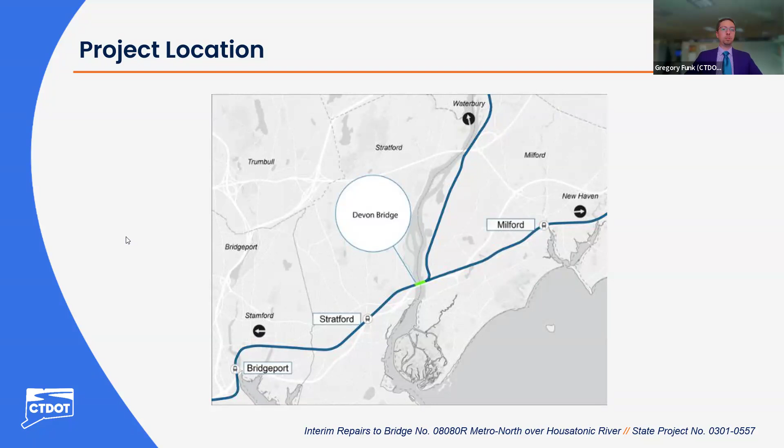So this virtual public information meeting is for the Devon Movable Railroad Bridge, which carries the Metro North Main Line over the Housatonic River between Milford and Stratford. The structure is number 08080R, and it is at railroad milepost 60.42. So the purpose and need of this project is to rehabilitate the Devon Movable Railroad Bridge to keep the structure serviceable until the replacement structure can take over rail service. And just to note that this meeting is for the interim repair project only. The full replacement project is in the preliminary stages and not part of this meeting.

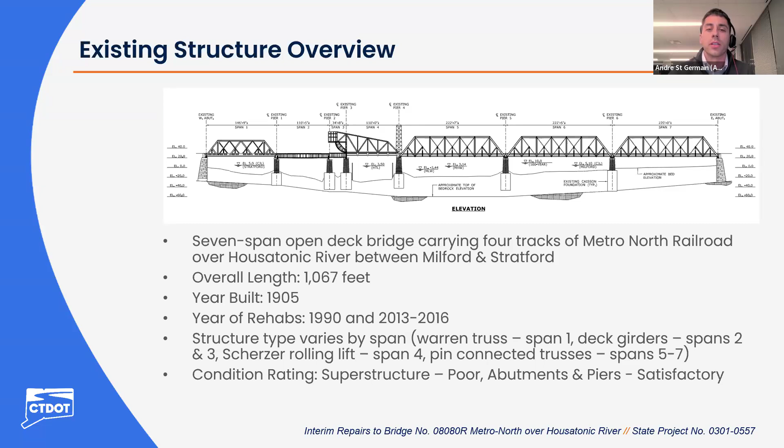Some other generic terms that I'll be using. Live load, this refers to the weight of the train that goes over the bridge. Dead load refers to the self-weight of the bridge itself. Finite element model, this is a computer model that is developed to closely imitate or replicate the actual real-life bridge.

Strain gauges, these are instruments or monitors that are attached to the bridge to gather information about the strain or stress or force that is going through each member. Hi-rail, this can be a construction vehicle or a maintenance vehicle that's intended for use on the railroad.

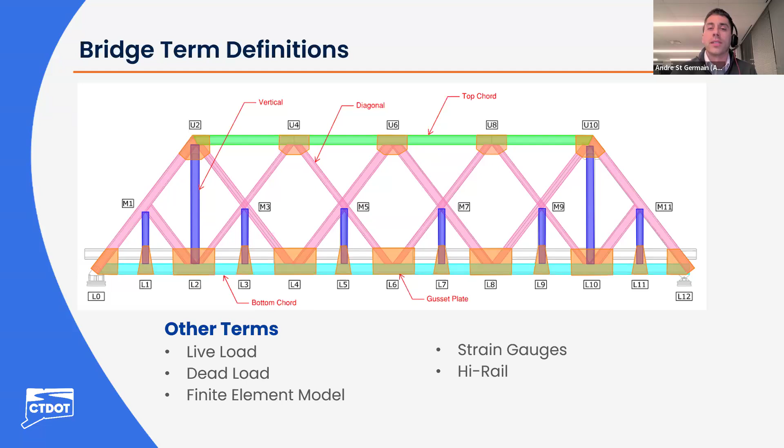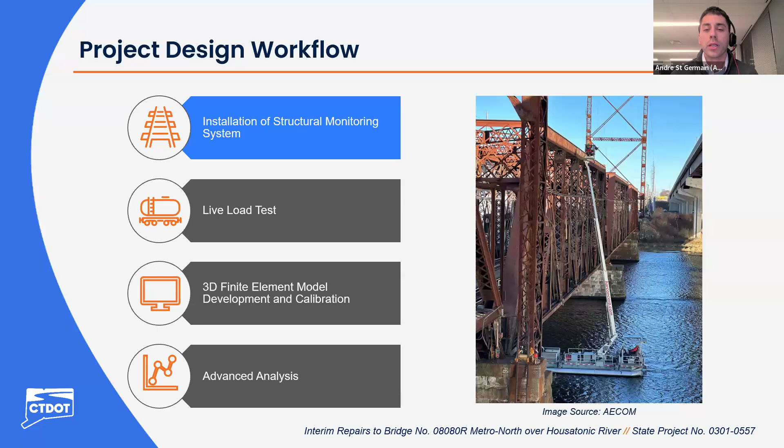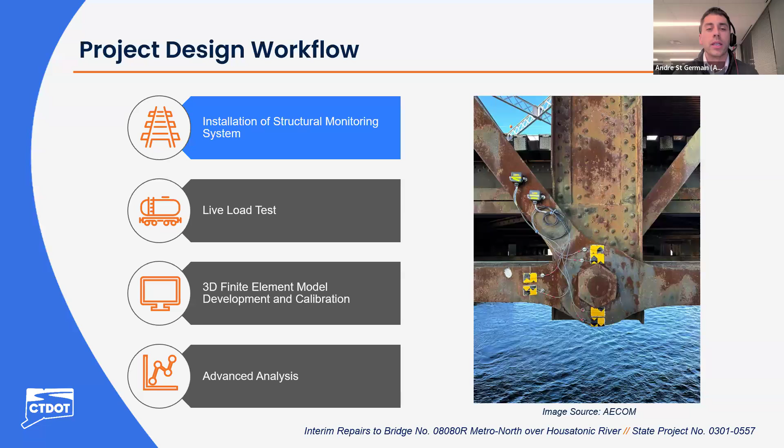Those data acquisition units communicate wirelessly to a computer that's actually on the bridge site. And then that's connected to the internet. So all the data that we collect gets uploaded to the cloud and we can access it live.

So after the strain gauges are installed on the bridge, we did a live load test. So basically we took a train with a known load. This is a GP35 locomotive. We know all the axle weights, we know the axle spacing, and we moved it across the bridge back and forth.

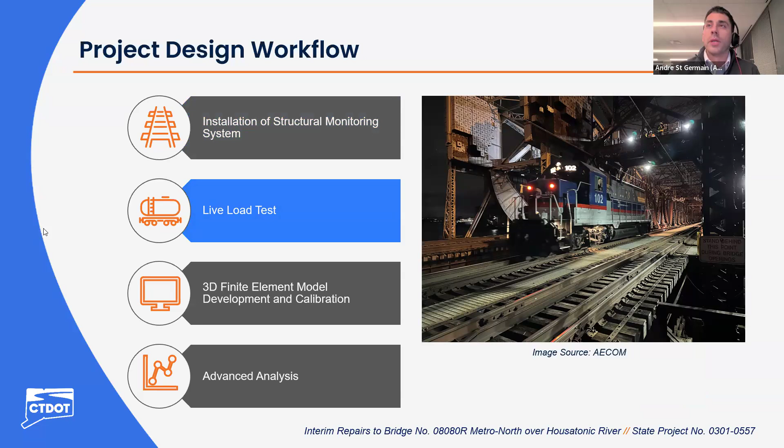And then using that information, we collected all the information from our strain gauges and we developed this 3D finite element model or computer model that closely replicates the existing bridge. And then using the data that we collected from the live load test, we can tweak the model so that it more accurately represents the behavior of the actual bridge. So we call that model calibration.

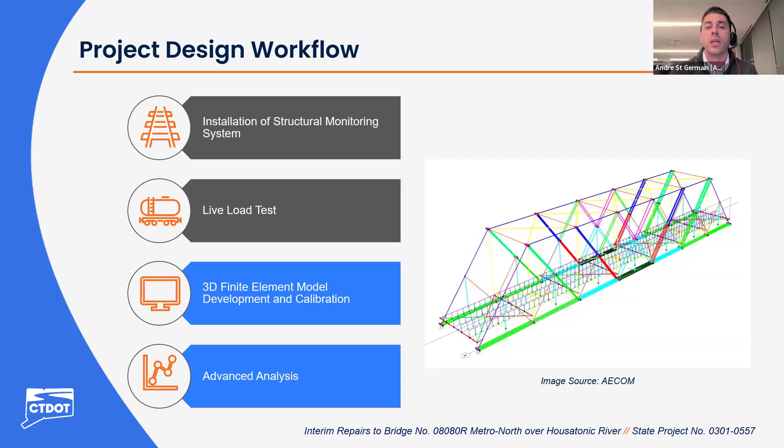And then once the model is calibrated, we can move on with our analysis and figure out exactly which members should be retrofitted to achieve that service life extension that we're talking about.

I will give an overview of the proposed repairs. So the bridge will essentially remain the same in terms of the footprint. So the number of spans will stay the same, the length of the members will stay the same, but we're going to be adding on or retrofitting the existing members. So from afar, the bridge is not going to look any different.

Some of the retrofits that we're talking about are adding additional steel plates to truss members, or the gusset plates, which are the connections between the truss members, or the connections maybe in the floor system where you have stringers and floor beams. There will be no modifications to the existing abutments and piers, as those are in satisfactory condition.

There will be no permanent changes to the surrounding environment. There will be some temporary impacts, and Ryan will talk about that in a little bit, but those are fairly minimal. And there will also be some temporary change in the low chord of the bridge, and I'll talk about that in a few slides, where we have an underslung platform as one means of access. So temporarily, the vertical clearance will get less beneath some of the spans.

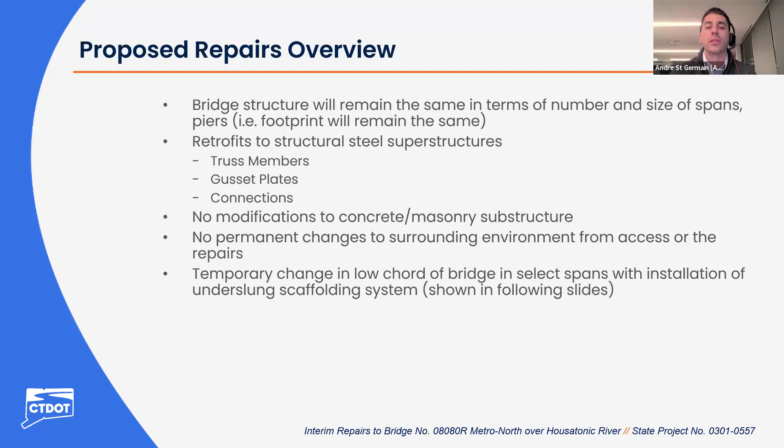To perform the work, there are 3 different types of construction access we're looking at. I'll go from left to right here. First, you have the Flexifloat system. So this is a modular floating barge system. It's kind of pieced together, and you could build it to any shape or size that you want, but it's very durable and suitable for heavier construction equipment. So that is one type that we'll be using.

Next in the middle, you have a QuikDeck. So this is an underslung platform that is suspended from the bridge above. Again, this is sturdy enough to hold equipment, materials, and workers as well. And then on the right is a high rail vehicle. This has a bucket along with it. So it's a construction vehicle that uses the rails on the railroad. And we'll be using all 3 of these. Those high rail vehicles can gain access to the track either from Naugatuck Ave in Milford or Longbrook Avenue in Stratford, depending on which track it's getting onto.

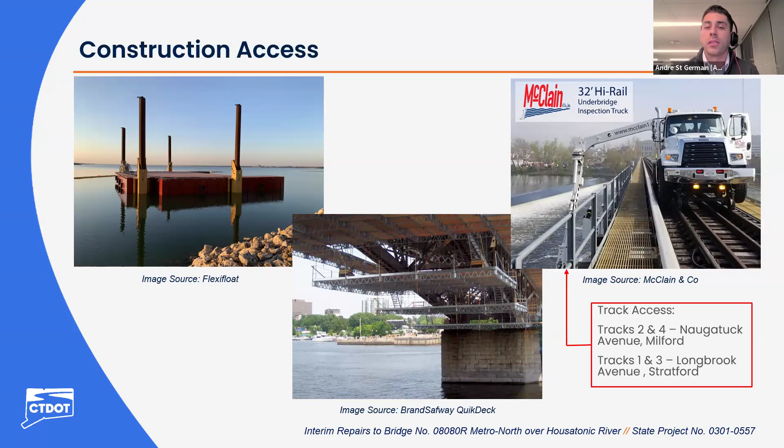And here's a graphic that comes out of our preliminary design submission showing the 3 different access types. I've highlighted them. So the highlights in green, those are the barges or flexi floats that we'll be using. At any given time, we'll only be using 2. This plan shows a lot more than 2 because this shows it for every single span, but we're only going to be using 2, and they're going to move sequentially. We're going to perform the work 1 span at a time, and the barges will move as the work is completed. The barges were used everywhere where it was deep enough to use barges.

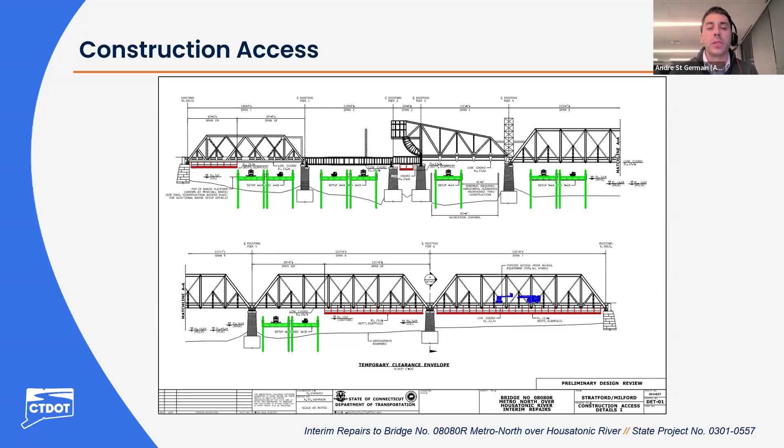So you'll see we're supplementing that with an underslung platform, which is highlighted in red. For instance, in span 1, which is the top left of the screen, all the way on the left side, it's too shallow for barges. So that's why we have the underslung platform proposed there. In the top middle of the screen is span 3. This is a very short span. And we need to use an underslung platform here because a barge just cannot physically fit within that area. And then in the lower right-hand corner of the figure, we're going to be using underslung platform beneath span 7 and a part of span 6 because it's too shallow. And then the third type is the high rail vehicle. So that's what's shown in the lower right-hand corner as well in blue. So we'll be using all 3 types depending on the span and location.

For the flexi float barging, we've been coordinating this closely with Connecticut DOT and Connecticut DEEP. The use of the Housatonic boat launch is prohibited on this project. This will remain open and operable at all times to the public. The contractor is not permitted to use this for construction activities. So the contractor will need to acquire waterfront access elsewhere.

For staging and laydown areas, there's a few different options. For work occurring on tracks 2 and 4, which is on the southernmost bridge, there's an area beneath I-95 on the Milford side. It's a big kind of dirt gravel lot. That will be used. And then it may also be used for work on tracks 3 and 1. If additional staging areas are needed, the contractor must acquire those areas for staging and laydown areas.

So there are some navigational impacts as there will be barges within the river. I mentioned there are 2 barges anticipated at any given time. One would be a work barge that would be about 30 feet by 60 feet, and one would be a material barge about 30 by 45 feet. Again, 2 barges at a time. They will progress span by span. The use of the Housatonic boat launch is prohibited, so that cannot be used.

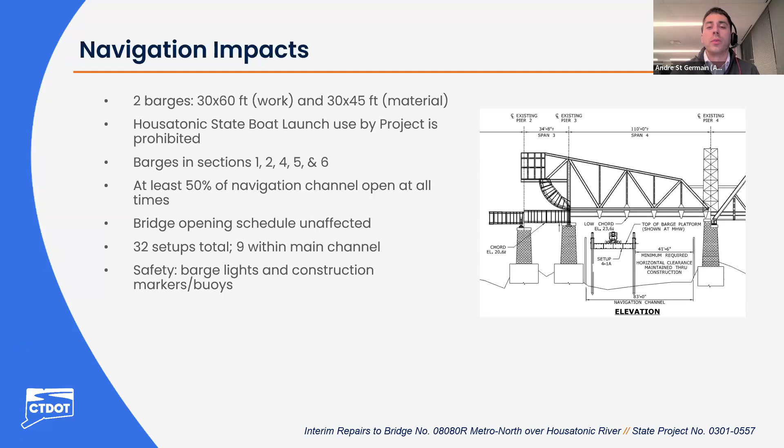And now I'll turn it over to Ryan Apanovitch, who's our environmental lead, to talk through some of the sensitive areas on this project. Thanks, Andre.

So as Greg and Andre mentioned, the project spans a tidally influenced navigable waterway, the Housatonic River. There are vegetated tidal wetlands on both banks of the river. And in addition, to the south of the Devon Bridge, there are mitigation sites that were put in place and created as compensation for impacts that occurred on a previous Connecticut Department of Transportation project for the Moses Wheeler Bridge. Shown in these pictures on the southwest side of the river are some of the areas that are indicative of the banks of the river. There are mud flats and sparse tidal vegetation between the Moses Wheeler Bridge and the Devon Bridge.

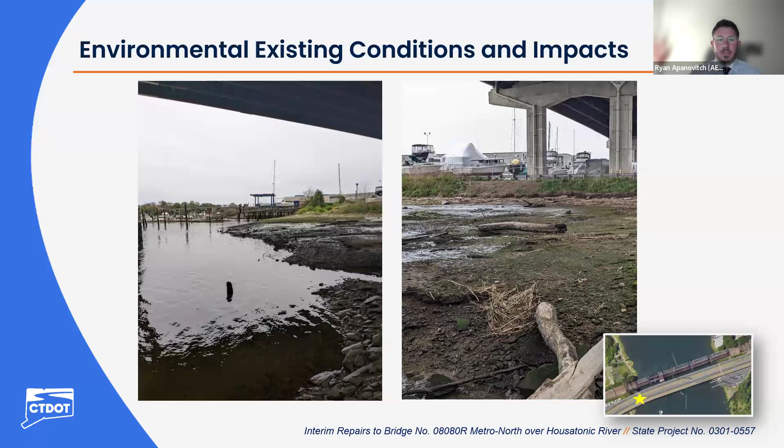Shown in these pictures, on the easterly side of the river, southeast of the bridge, you can see some of the mitigation areas that were created. In the photo on the left, you can see a mud flat, and on the photo on the right, you can see some sparse vegetation that's just starting to grow from the beginning stages of the mitigation sites that were constructed.

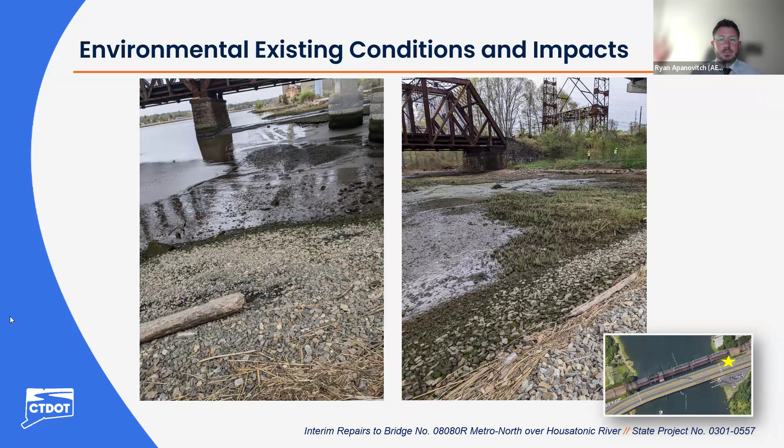These photos are further south of the bridge, south of the Moses Wheeler Bridge, and the photo on the left shows the boat launch, which, as Andre stated, will not be used or impacted as part of this project. It will remain open and accessible to the public during all phases of the work. To the right on this photo is just a picture of what the natural tidal wetlands look like in the area. So one of the secondary goals of the project was to avoid impacting locations like this.

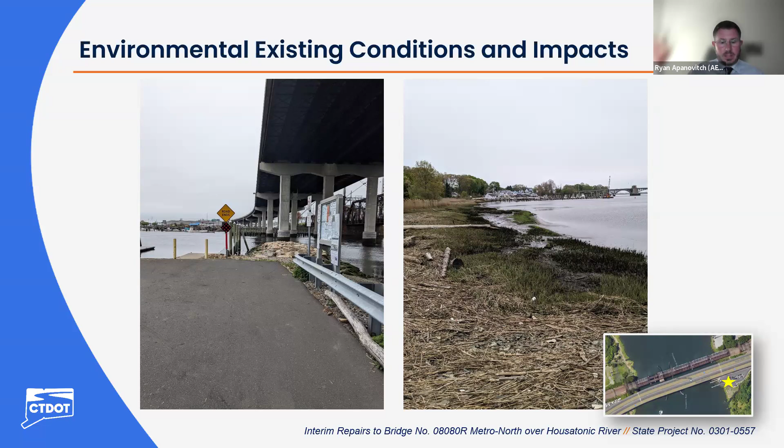So in order to do that, as Andre explained earlier, there was a significant effort put into engineering specific access methods for the construction. These methods were meant to expedite the design schedule and minimize the amount of impacts, therefore creating a simplified permit process. The permits that have been obtained by the department to perform this work are a certificate of permission from the Connecticut Department of Energy and Environmental Protection, a flood management general certification.

They will be obtaining authorization from the U.S. Coast Guard through a construction letter, and then the contractor will also be required to submit a barge notification form detailing their work in the water. There was also a coordination with the Army Corps of Engineers Section 408 Division. This coordination was a result of barge work within the Federal Navigation Project, the federally maintained navigation channel, and the coordination has been completed with some stipulations that will be put into the construction contract.

In addition, there were consultations performed with outside resource agencies such as NOAA National Marine Fisheries for Section 7 Endangered Species Act consultations. This was as a result of sturgeon that are present in the waterway and the critical habitat for the Atlantic sturgeon. Coordination was also done with CT DEEP Fisheries, CT DEEP Natural Diversity Database, and the Connecticut State Historic Preservation Office to obtain clearances regarding Section 106 coordination.

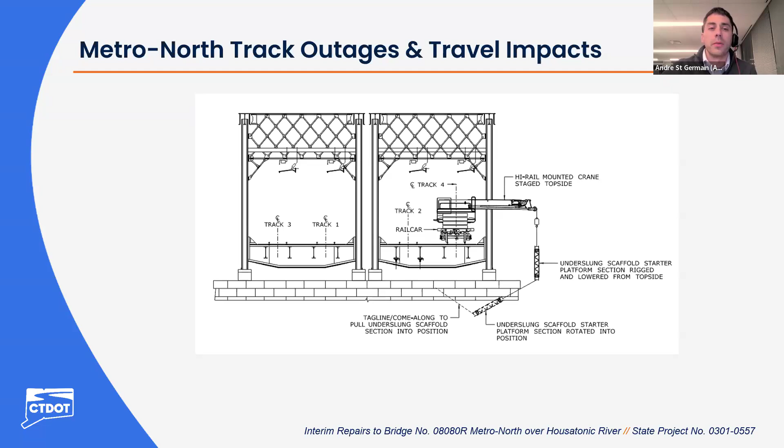So just the nature of the work, while you're doing a repair to, let's say, the southernmost structure, which carries tracks 2 and 4, you need to take tracks 2 and 4 out of service at the bridge, and vice versa. When you're doing work on the northern bridge, you need to take tracks 3 and 1 out of service. So what does that mean? Next slide, please.

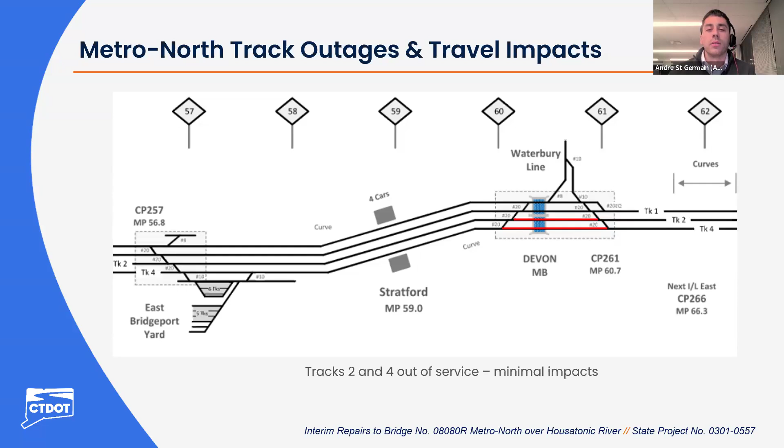Next slide. A greater challenge is when we're working on the northern bridge, which carries tracks 3 and 1, for two reasons. One, you don't have the luxury of those crossovers immediately west and east of the bridge. And second, you have the Waterbury branch line, which is accessed through track 3. So when we're working on that northern bridge and tracks 3 and 1 are out of service, the outage area is much longer, as you see here in red.

Stratford Station will still be accessible via temporary bridge plating, but the Waterbury branch line will not be accessible. So we'll need to either use busing or a temporary transfer station to make sure users along the Waterbury branch line still have access to their everyday needs.

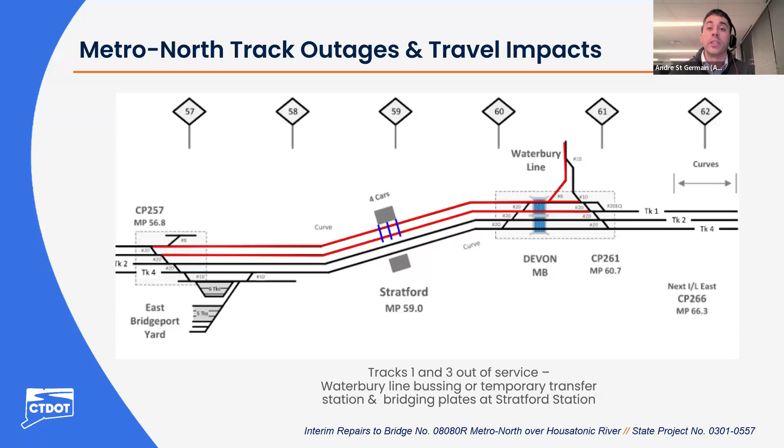The TIME 1 project limits start right at East Main Street in Stratford, and then they continue 3 miles to the west into Bridgeport. That project is split into 3 different construction phases, and the first construction phase is slated to start this coming spring. And so that project will be in construction at the same time this Devon interim repairs project will be in construction. So we are closely coordinating the outages because both projects require track outages. We need to make sure that the track outages are not conflicting with each other, and we're doing that right now and working towards that.

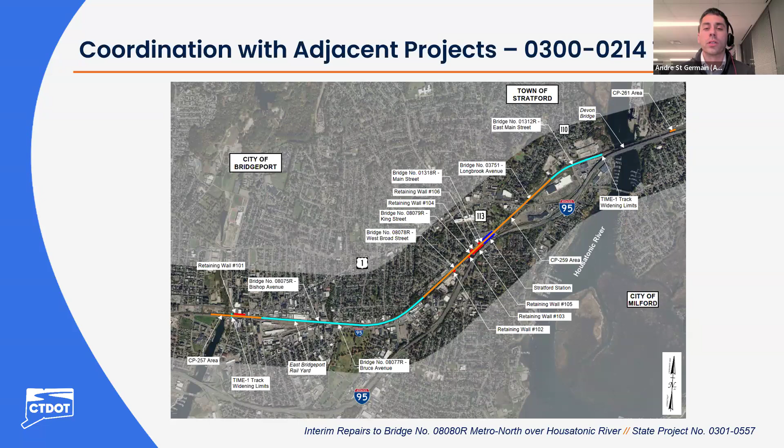All right, thanks, Andre. Another project that is adjacent to the project that we're presenting tonight is the Waterbury Line Station Improvement Project. So this adjacent station improvement project will include their own outages on the Waterbury Line anticipated in 2026. So as Andre just mentioned, the interim repair project has optimized outages with the TIME 1 project. The design team for all the projects are currently working to identify if outage schedules can be streamlined between all 3 projects.

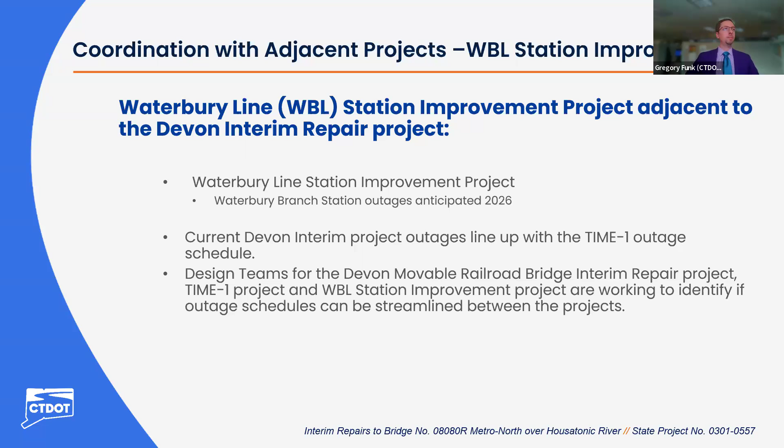The current cost estimating is ongoing. We are anticipating between 80 million and 110 million. At this time, the project has a federal grant and is being undertaken with 80% federal funds, 15% state funds, and a 5% Amtrak contribution. We have a construction start date of October 2025, and our duration is anticipated as 2 years.